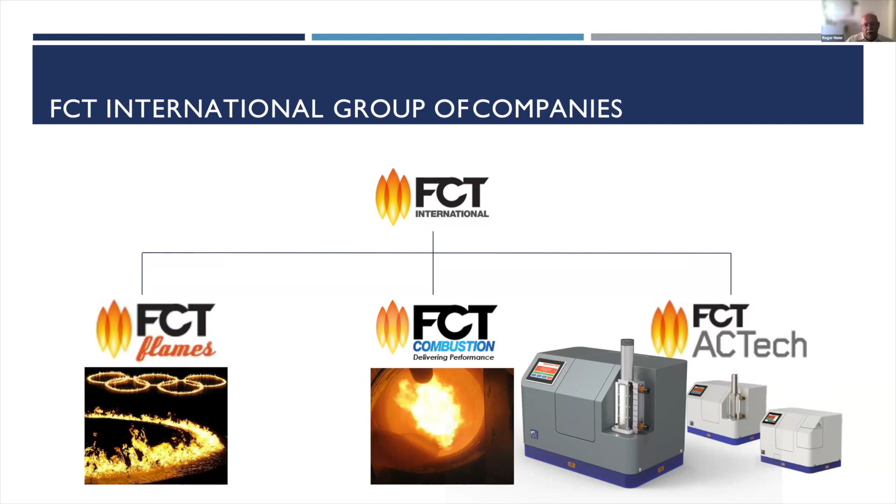And then the company I work for is ACTech, where we build the analyzers for you. These analyzers are a little bit different, but I will come to the details a little bit later.

Now, how are we spread on the globe? Our headquarters is in Adelaide, Australia, where we do the manufacturing, the R&D, and the setup of the systems. And then we have representations in Europe. My combustion colleague is based in Vienna, and I am based in the Netherlands. And then we have hubs in the western part of the Americas and in Brazil.

ACTech was founded in 1999, and the big difference of our analyzers compared to all the other ones is that we always deliver complete end-to-end solutions. Today we have 8 different products with various applications in the cement industry and also in mining and minerals processing. I would like to go a little bit later to the details.

And here is one selection of our customers that made together with us these products, because we are always on a learning curve, and we try to deliver really the things you need.

So if we look back in the history, then our first online product, the Cosma Analyzer, was developed in close cooperation between Adelaide Brighton Cement and CSIRO. And in 1999, we more or less formed the company and delivered the first professional XRD online instruments.

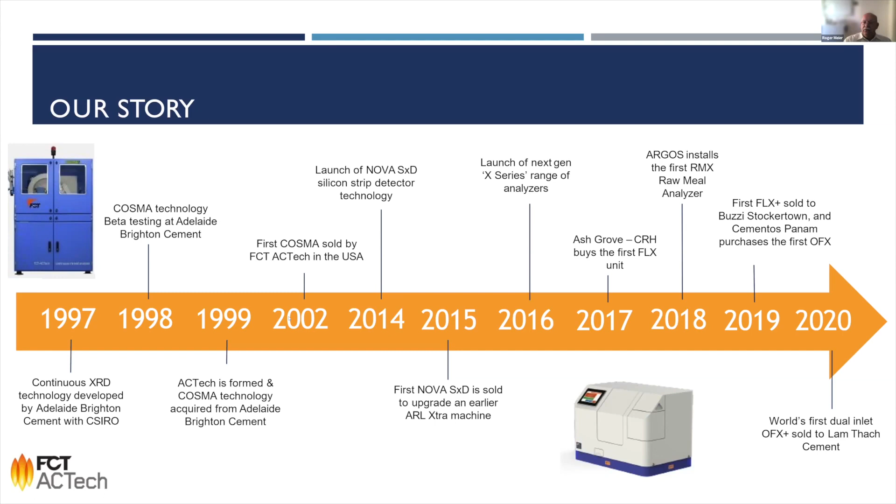And then fortunately, over the years, the technology developed, and we got the chance to improve the products. And since 2016, we came to a product range which is, I would say, the state of the art for process and quality control that you can get today.

And this is also one clear differentiation between our products and all the lab products. We focus on process and quality control. And it's very easy to understand that if you really monitor your process streams, you can easily improve the environmental impact, you minimize waste and rejects, you have a better quality, and this comes together with fuel and energy savings.

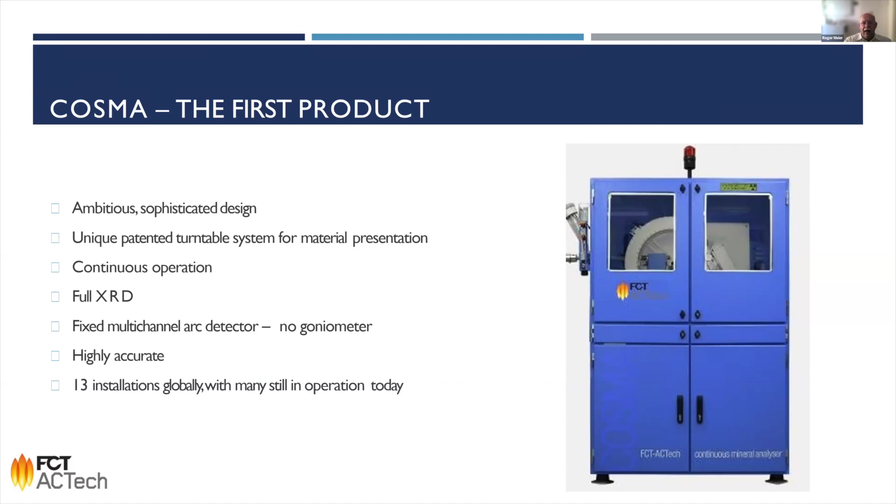If we look now to our first product, the Cosma Analyzers, it was a slightly bigger machine with a full XRD, with a multi-channel arc detector to cover the complete 2 theta range simultaneously. And over the years, we had a couple of installations where the cement industry utilized this technology.

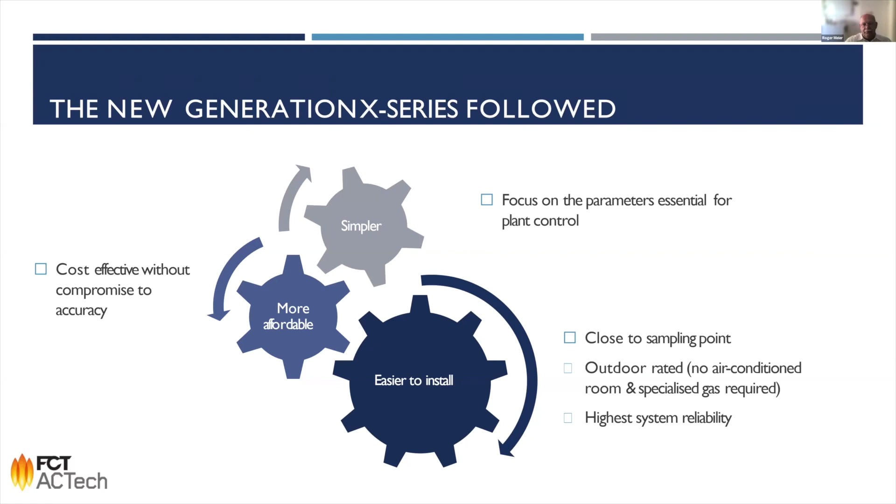But of course, if you start in such a new field, not everything is super perfect. And we had the goal to produce an affordable, simple, easy to install machine that can give you as a cement producer the highest benefits. And I think we came really very close to the absolute perfect solution.

And for this solution, we have to differentiate the specific needs in the process. And for that purpose, we came up with different machines.

So if we look through the process, then at the first point is after the raw mill, where our RMX, which is an elemental analyzer, can help you a lot to reduce the standard deviation in the process of the LSF and the other modules to get a good control on the raw material. Here we look only on the XRF part, so the elemental analysis.

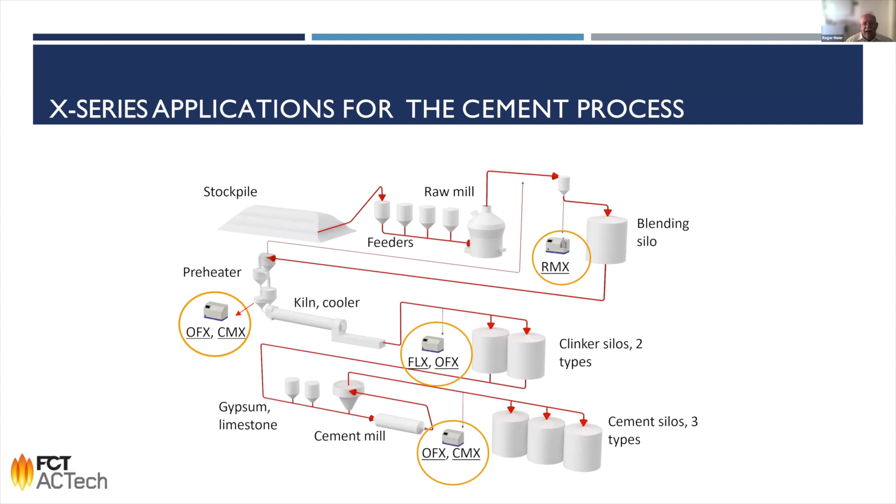Later in the process, we have the OFX, the FLX, and the CMX machine, which I will show you a little bit later the details about, where you get a combination of XRD and XRF to really have a good grip on your process. All the machines are super compact. The size of this gray box with the blue bottom is about 80 by 60 by 50 centimeters.

The huge difference between a conventional lab analyzer and our equipment is that we do not prepare an individual sample. We connect our analyzer directly via this tube with a sampler. We can also do multiplexing to connect it to two samplers to switch between different sampling points. The material is processed through the analyzer, analyzed in real time, and either collected for subsequent tests in the laboratory or automatically returned to the process. So it runs fully without human interaction.

You might need about 15 to 20 minutes per week for a little bit of cleaning and looking after the system, but it is not like the very complex installations of robotic laboratory or other equipment where you really need to have a champion next to it. It really runs fully unattended.

You get a result every 5 to 7 minutes, I would say, which can be directly fed into your process control software or your LIMS system, etc. The whole system is very compact and self-containing, so you don't need, besides electricity and maybe some helium for light element performance, no other supplies. You don't need external chillers or other media to run the system. The consumption is very economical, running with less than 1 kilowatt hour.

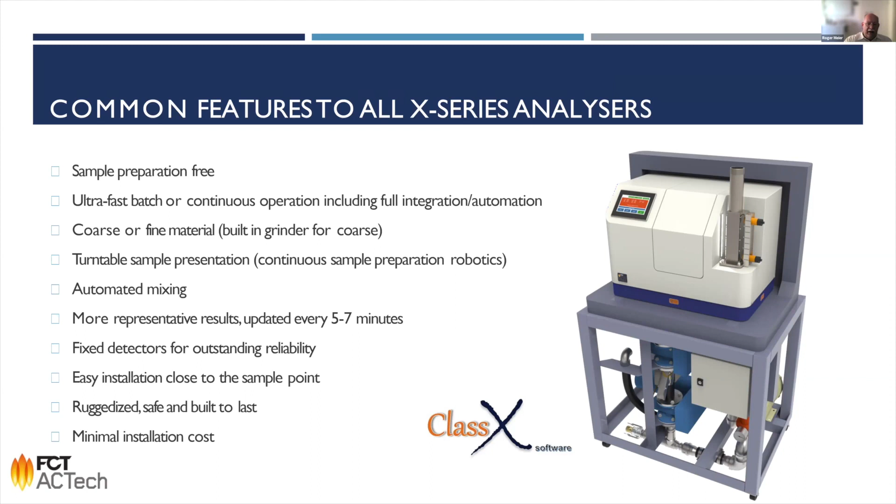The machine can be put in a ruggedization kit to isolate it so you have a constant temperature. So the equipment does not require a laboratory container in the field. It can simply be placed next to the process as long as there is no direct sun or rain hitting the machine. Here you see one typical installation of our FLX, the free lime analyzer.

All fine materials like raw meal, cement, etc. can be measured directly. In case of clinker, we use a primary crusher to reduce particle size, and we have an integrated mill inside to have a proper representation of the sample.

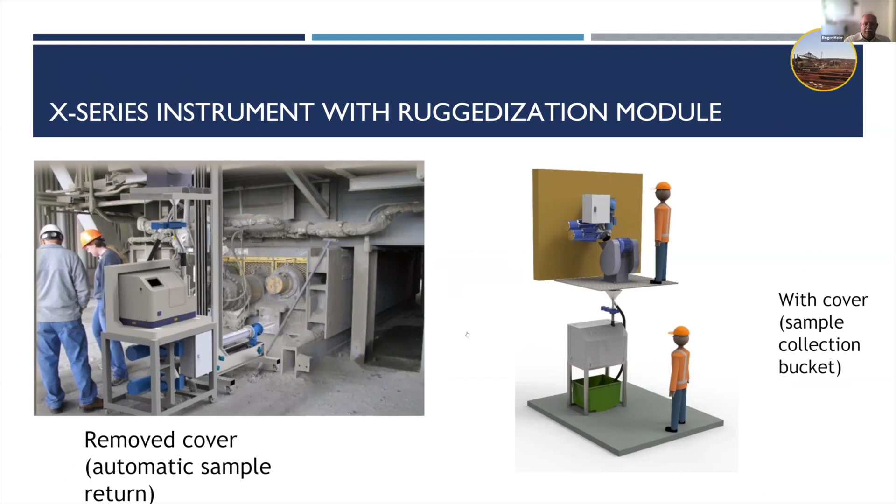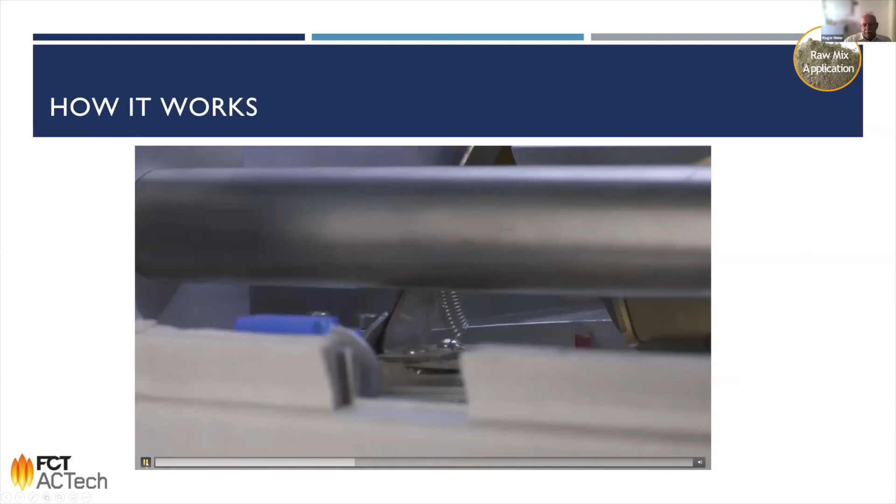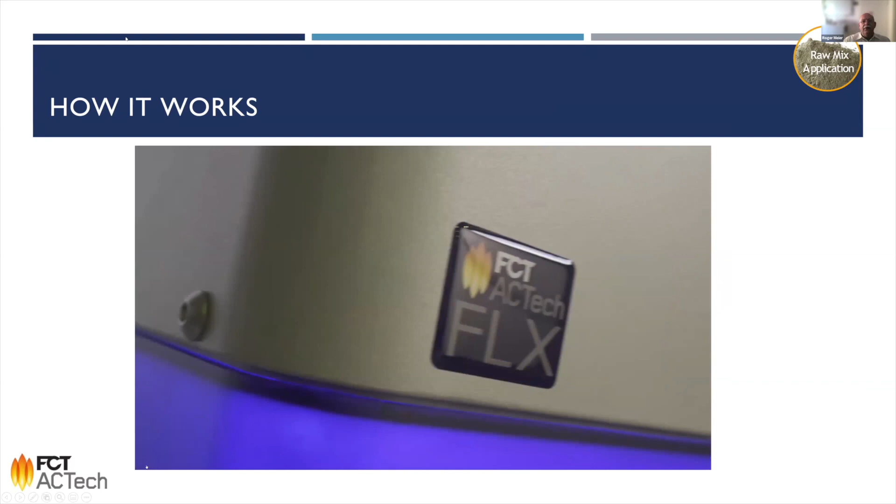So how does the measurement work inside? I prepared for that purpose a short video. We use a far larger sample size to have a much better representation of what's happening in the kiln at any given moment. So you see the material moves constantly through the analyzer.

This is also the big advantage of this technology: you don't have a static sample, you have a moving sample. If you compare it with a lab instrument, where usually the amount of powder in a press pellet is 10 grams, of which you hardly measure 1 gram, we process between 2 and 3 kilograms per hour, where the majority is measured. So you have a gain of up to 50 times more material being measured, and therefore much better information about your process.

Now about the different applications, starting with the raw mill analyzer, which is only an XRF analyzer, suitable to measure all the elements from sodium to uranium. Usually for cement applications we focus on silicon, iron, aluminum, calcium, sulfur, magnesium, but other elements on demand can be discussed to be included.

It is a constant measurement, so you get a result every approximately 5 minutes. We steer the sampler in a way that either we use a bypass system or we switch it on and off by looking at sensors, so we always have fresh material in the analyzer. The benefits are, I think, very obvious: having a very low standard deviation in the feed of the kiln, you reduce fuel cost, you need less energy, you avoid a lot of issues. It will have a very positive effect on wear and tear.

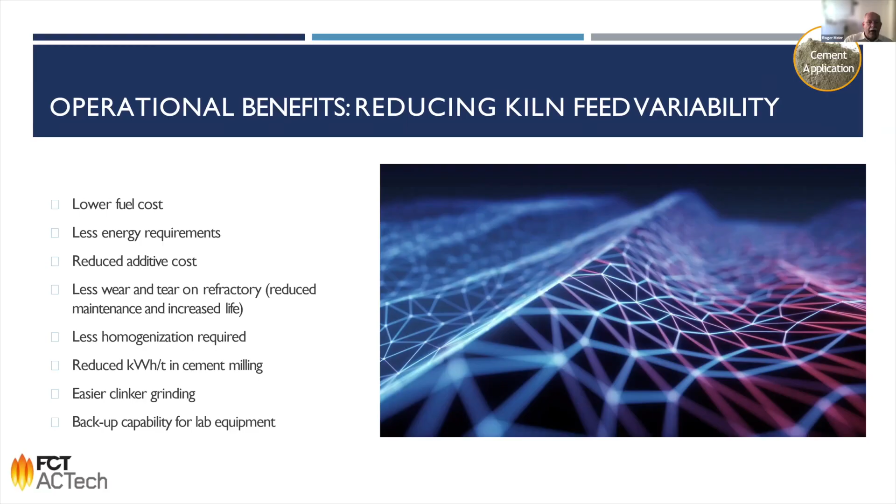In the next step, we switch from the XRF to the XRD part. This is the free lime analyzer, usually positioned after the clinker crusher, after the sintering process, to see the free lime as an indication of the burning conditions in the kiln. This analyzer uses only XRD technology.

For those not familiar with the two techniques: with XRF, you measure elements; with XRD, you measure mineral phases. One good example to illustrate this is if you take a piece of coal and a diamond and do XRF, you find out both are built based on carbon. But if you look at the mineralogy, the XRD signal, you see a different structure, and the structure usually directly predicts the properties of the material. Therefore, mainly after the kiln, you look more at the properties, and there XRD has a high added value.

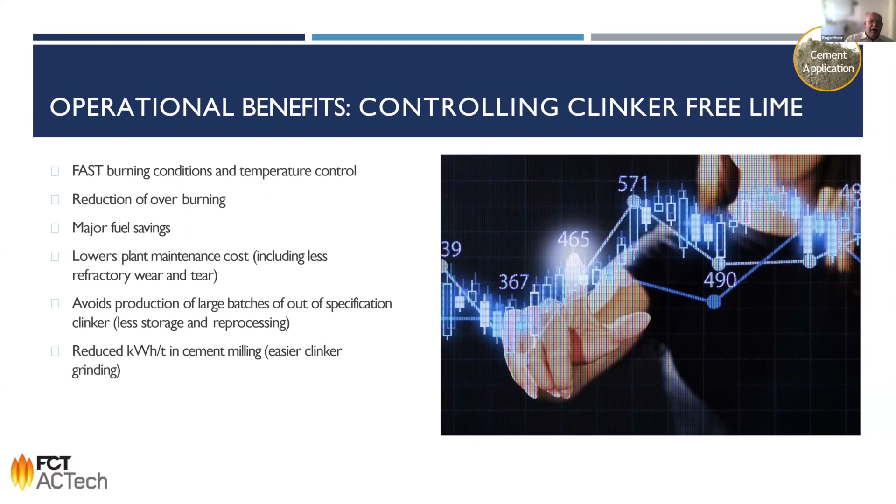And the advantages are very similar to the RMX: reduced energy consumption, a more smooth process, and reduced emissions.

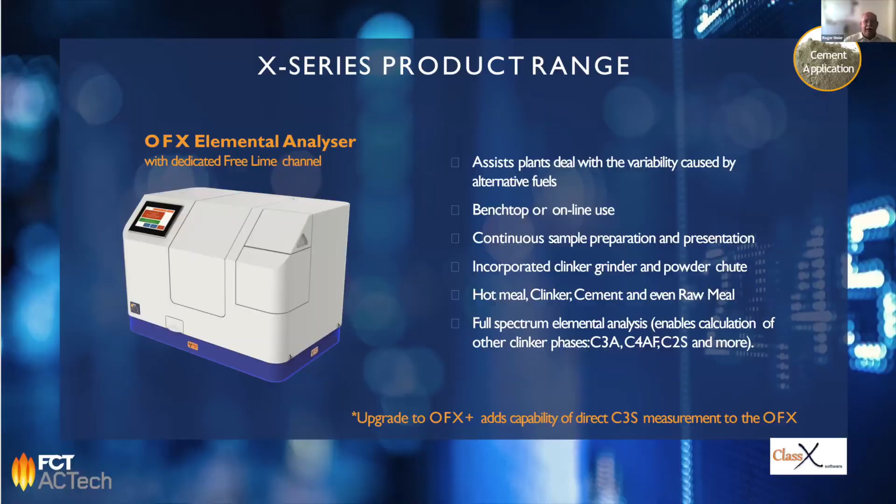If you go further down in the process, or also at that point, you can use the OFX, which is a mixed analyzer. It has two X-ray tubes and two detection systems to measure both the mineralogy and the chemistry. This gives you the full picture of the composition of the materials, and you can really tune the process so it's super efficient and sharp at the target values.

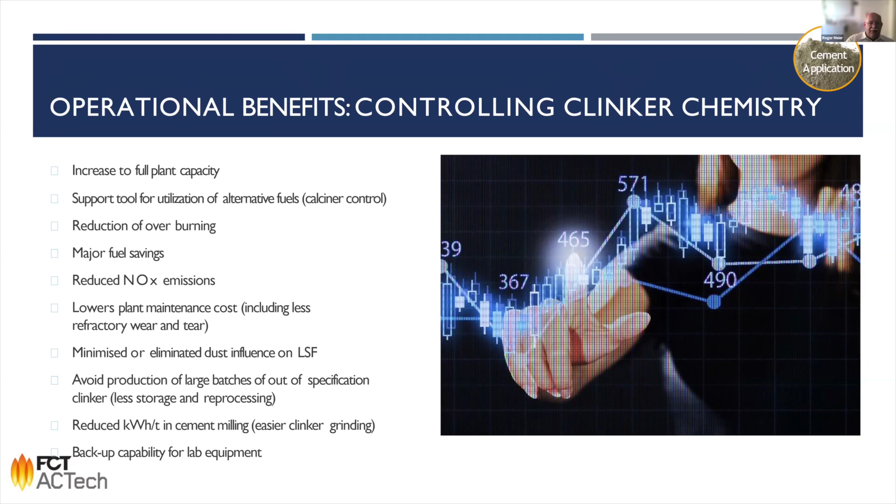Not to waste energy, but to guarantee at the same time that you are on spot and your customers get the materials they expect. The last system in the process I want to introduce today is the CMX beta cement analyzer. It's a machine tuned for the analysis of cement after the cement mill.

It comes with a larger XRD capability, so besides the free lime and the alite, it can also measure minerals of interest like gypsum and calcite, as well as elements like chlorine. With this combination, you have a very detailed look at your material, and you can tune all the parameters you'd like to have a perfect quality control of your final product.

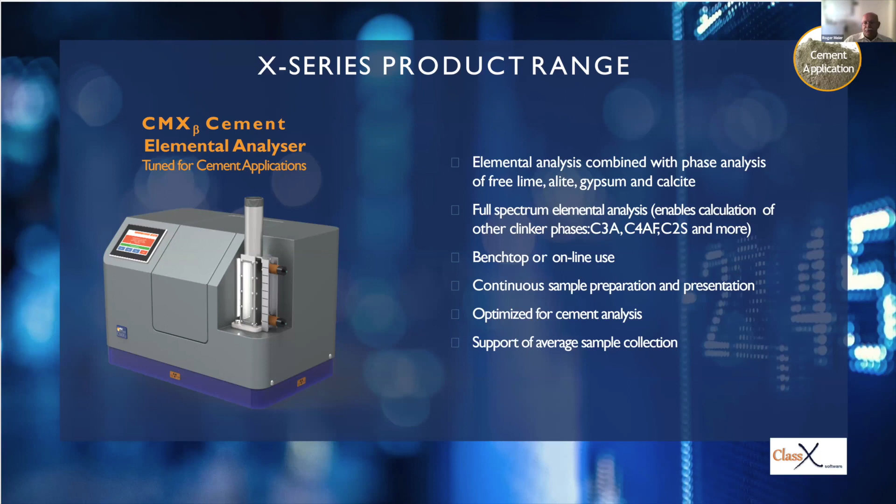This opens up various possibilities. On one hand, you can reduce the clinker factor, which directly leads to a reduction in CO2 emissions. It can also be used to add other additions like bypass dust to the normal expected limits, so you don't get an overshoot of the chlorine, for example.

You can also use it on the process side, as this real-time instrument gives you very important information on when to switch between different cement grades, so you don't waste the expensive product in the wrong silo.

Overall, by looking at all these parameters, it enables you to reduce the wear on all the heavy equipment by running a process more smoothly.

And of course, for the new cements in particular, the things we heard yesterday, the PPC cement with fly ash addition or composite cements with fly ash and slag, these type of analyzers are very mandatory to be sure the quality you deliver is within spec and gives your customers what they'd like to have.

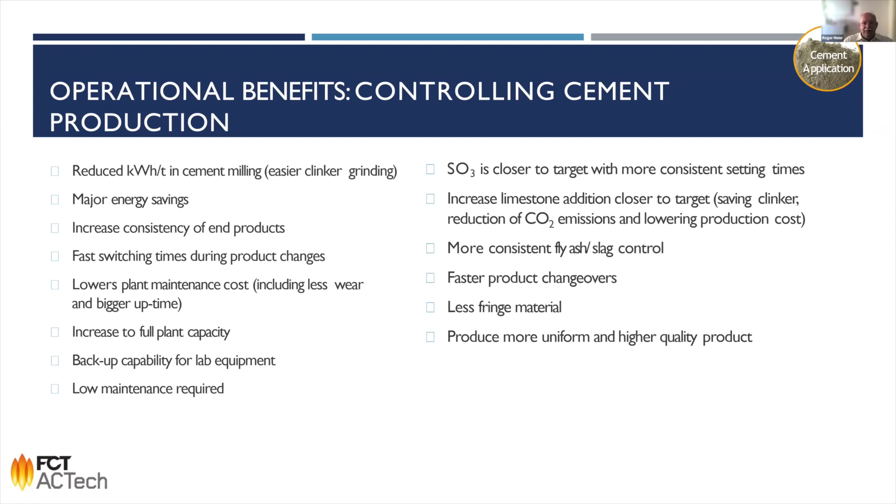So I hope with these slides I've shown the added value of our instruments, in particular to be more efficient, to reduce CO2 emissions, and to have a very good grip on all steps in the process. There are some more possibilities which, for time reasons, I didn't include in the presentation, but please feel free to contact us or my colleagues so we can discuss the pain points in your process and where our equipment could help you.